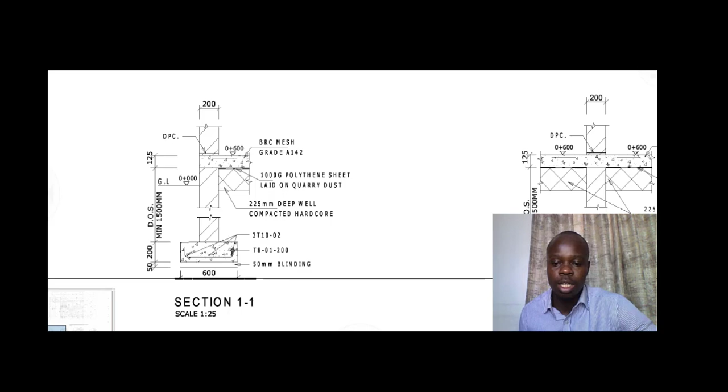So we'll be doing the items in the substructure works first, all possible items. I've prepared a comprehensive list of substructure items, along with a section showing which part of the standard methods of measurements those items are provided for, and also the specifications. Those are the key items or descriptions you always need to consider while doing your measurements. I think it's wise to do this so that whoever was digging for the rules one by one can now have it even easier, with a summary of these rules done all at once.

So that brings us to our session today, and this is what we've prepared for you: a comprehensive summary of the substructure elements, in regard to the standard methods of measurements. We have a list of the descriptions of the items, a column expressing the units of measurement, which is what's going to be translated into your bills of quantities, and also the standard methods section, the SMM section. After this session, when you search from that given part, you're able to get that given reference. This is meant to ensure you have clarity on what you're looking for in terms of measurement.

So it's quite important that we consider this, so that in our next session it becomes even easier when you are trying to measure. I always emphasize to my viewers and students that you must learn the rules and the units of measurements, because when you do so, whenever you're presented with a plan, it becomes much easier to undertake the measurement, since you know that for a given item, for instance cutting trees, it should be done in numbers.

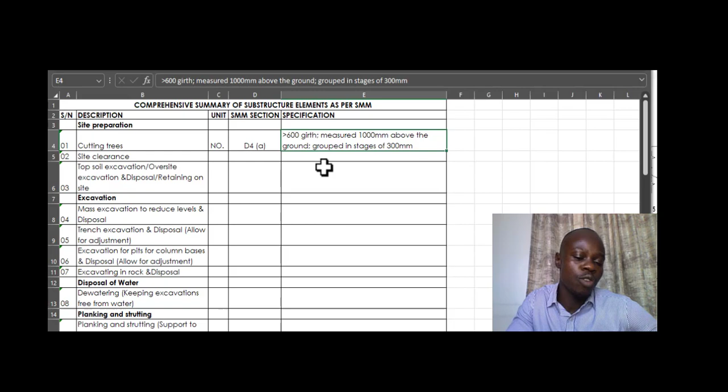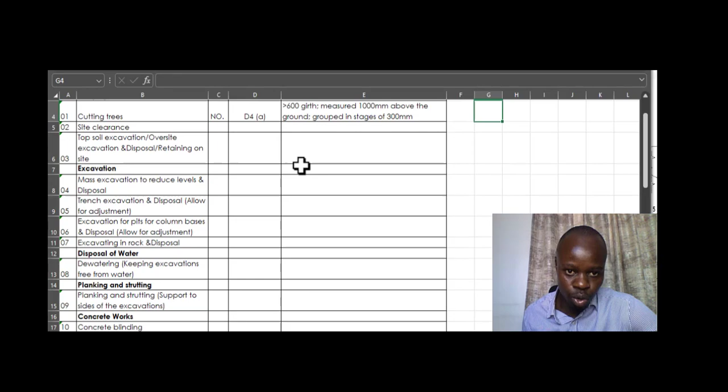You realize that when it's 600 millimeters, greater than 600 millimeters in girth, above the ground level, then in that case you identify it as a tree, and you now measure it in stages of 300. So the first stage, for instance, would be a group of 600 to 900, then 900 to 1200. So that is how you do that measurement.

Then we go to site clearance. For site clearance, how do you do that? It's measured in square meters. For the square meters, what is it that... okay, square meters. So we see from the square meters, what is also another crucial aspect that we need to consider.

It's from the section of D4C, and then the specific rules that are guiding it include the bushes, scrub, undergrowth, and grubbing up roots. Now those are the specifics, what you need to consider when you are doing the site clearance.

So of course for square meters, you just need to get dimension 1 and dimension 2. You get the areas. Depending on how you subdivide your plan, then you attain what is the final output that is needed in square meters.

Then we have the topsoil excavation, also done in square meters, and then the section where it's found is section D3. Now that is the section of the standard methods of measurements, where you are going to find that given rule.

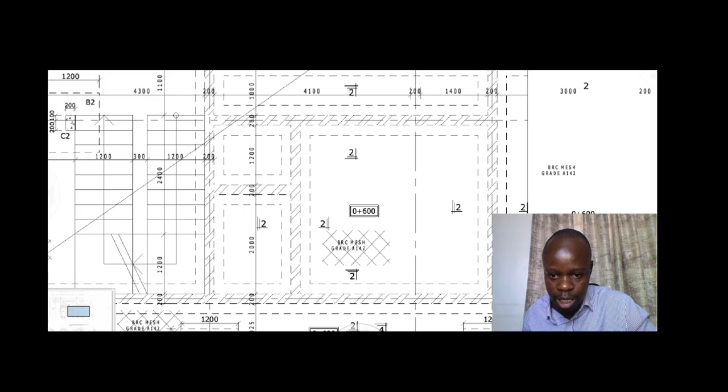Okay, this part highlighted here is now the wall. But then there are spreads, both the internal spread and the external spread. So normally when you are doing the site clearance, you will always consider up to the external spread. That is why when you look at the section I drew, you realize that the wall is there, and then to the external spread you have the oversite. So of course you'll do it to any thickness, for instance 150 millimeters thick, as I had mentioned.

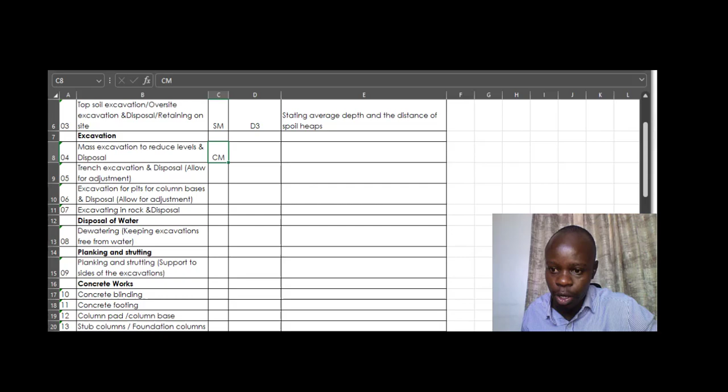So moving on, we've talked about the topsoil excavation. Moving on, we go to mass excavation. Mass excavation is done in cubic meters. So let's see from which section that is guided - from section D6 of the standard methods of measurements.

Once you've identified that, we now see the specific items you always need to remember. You need to know that if it's greater than 300 millimeters thick, that is when you do it in cubic meters. For instance, when it's less than 300 millimeters thick, then you do it in square meters, of course stating the average depth.

Then there are other items for the other part of that statement. For instance, basement, D5F applies. D5F is the section of the SMM which talks about measuring the excavations in stages of 1.50 meters. That is what that part is talking about.

These instances where you might have mass excavation include, for instance, when you have black cotton soil - soils whose characteristics will compromise the stability of the building. That means when you have them, you need to excavate all of them off the site. So when that happens, you also need to know how to go about that as the quantity surveyor. For instance, in that case, you need to measure them in cubic meters, especially when the thickness is greater than 300 millimeters. When it's less, you do it in square meters, stating the average depth.

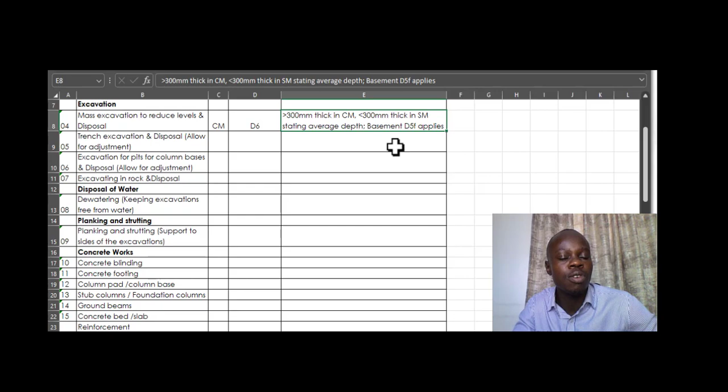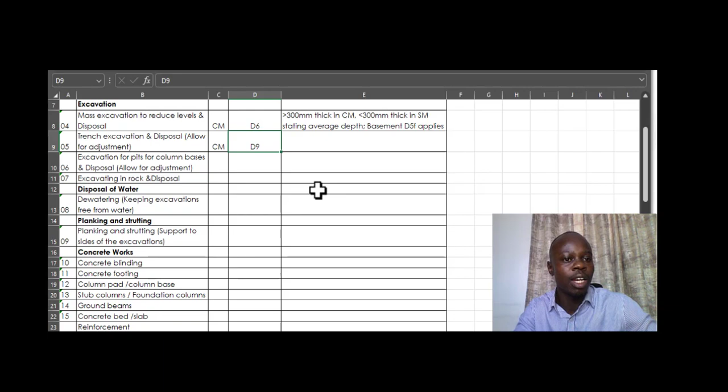Then we move on to trench excavation. Trench excavation is also in cubic meters, and you get that from D9, the section D9 of the standard methods of measurements. The rule states that in this case what you need to do is your excavations in cubic meters, and of course you conform to the rule of D5F, stating that you need to do your measurements in stages of 1.5 meters.

Okay, in this case there is normally one thing that is quite confusing, or gives my students a difficult time. That is now the disposal and also the return fill and ram, or what you can call backfilling. So let's look at this section which is also meant to make your work easier.

So at the time when you are doing your excavation, you've done the whole trench. For instance, you did your site clearance - that is process 1. After doing your site clearance, you've done the oversite, where you've allowed for stripping of the topsoil, for instance 150 millimeters thick. Once that is done, you realize that from that point, just beneath the topsoil stripping, you've already taken it away downwards up to the bottom of the footing, or you can say bottom of the blinding.

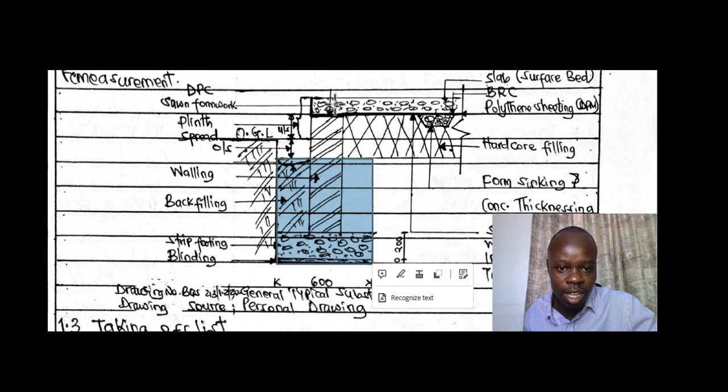But then there is always what we call adjustment - you can have the backfilling on both sides. For instance, if you have backfilling at this part, and also on the inside, the internal spread, then what you do, if you have these two, is what we call the backfilling.

So at one instance, you've disposed of the materials. You've allowed for the disposal theoretically, but then at another time you are going to allow for backfilling. This means the total volume you had disposed, you need to deduct the backfilling, and add the filling. So you deduct it from the disposal you had already done at first instance, and then add the filling to those given parts. That is basically what you mean when you talk about adjustment for backfilling.

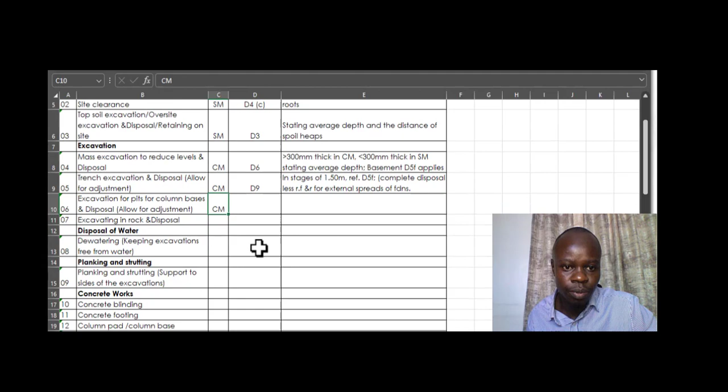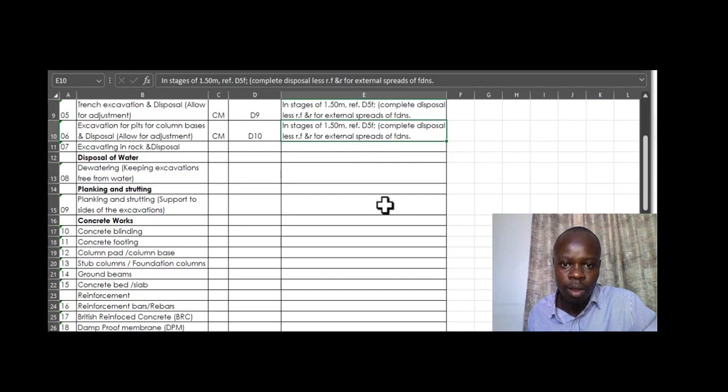Once that is understood, we move straight to the next item, which is excavation for pits for column bases. Whenever you're doing column bases, the rules remain the same, but you get it from D10, and the stages of excavation in stages of 1.50 meters is constant.

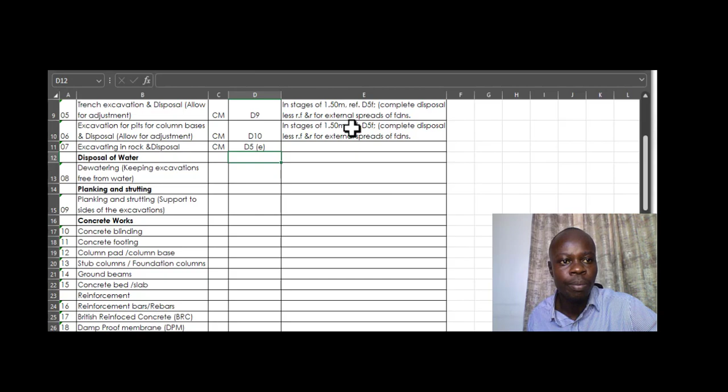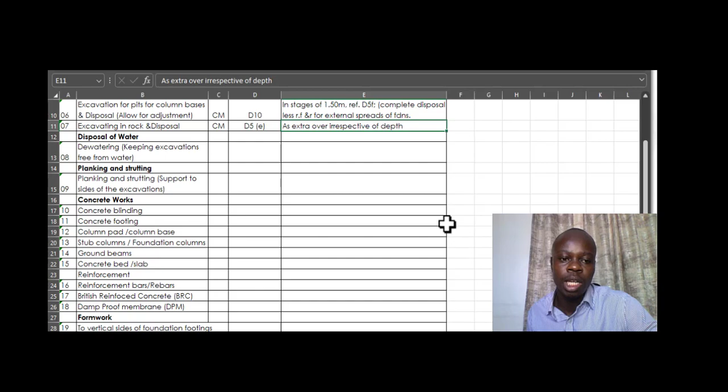When we move to excavating in rock, that is gotten from D5E. It's talking about extra over, telling you that you measure it as an extra over item always when talking about rock excavation, irrespective of depth. I'll keep reiterating that an extra over item means items you've already measured in your previous working, but you are also measuring them again because they require special treatment, meaning the cost implication is more than what was captured in the previous item. That is why you measure them as extra over in regard to that particular rule. Then the next is disposal of water.

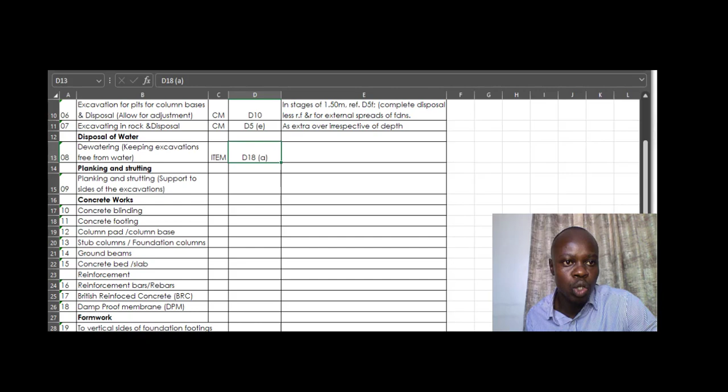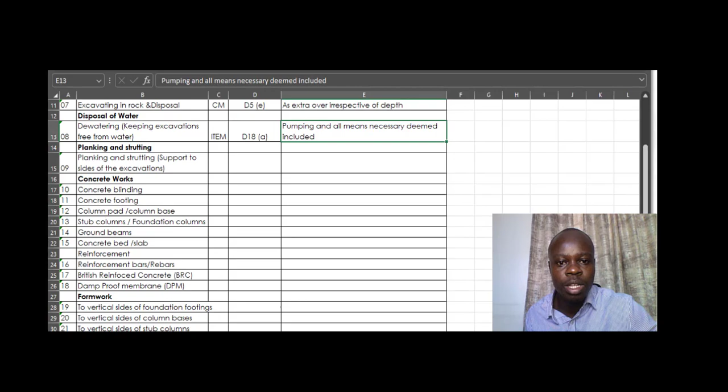These are measured as items, so there is nothing much to say. It's D18A, and it's always deemed to be inclusive of all items, including pumping or any other means necessary to dewater the site at a particular time.

Then planking and strutting, which is basically support to the sides of excavations, to prevent the materials from returning back into the trenches or pits you've excavated. Reason two is also to prevent possible damage or injuries to the workmen, so they are not hit back by the items you've excavated and taken off the trenches or pits. You go to section D19 for the specific rules, and that is it.

Then we move next to concrete works.

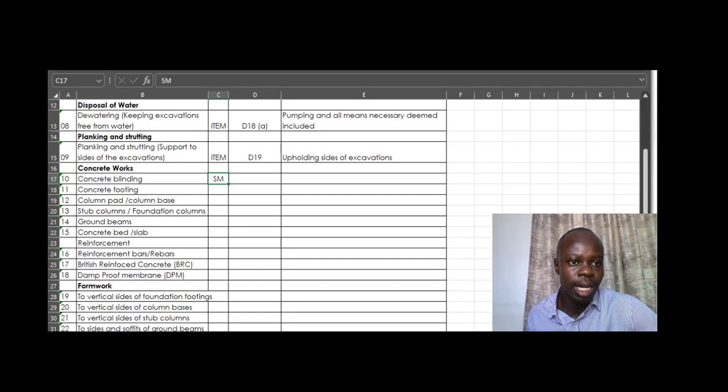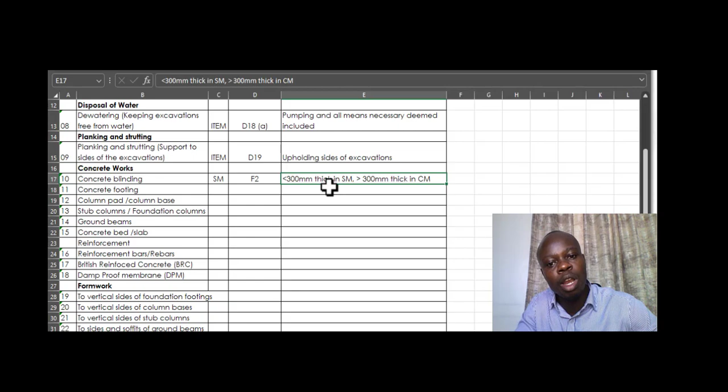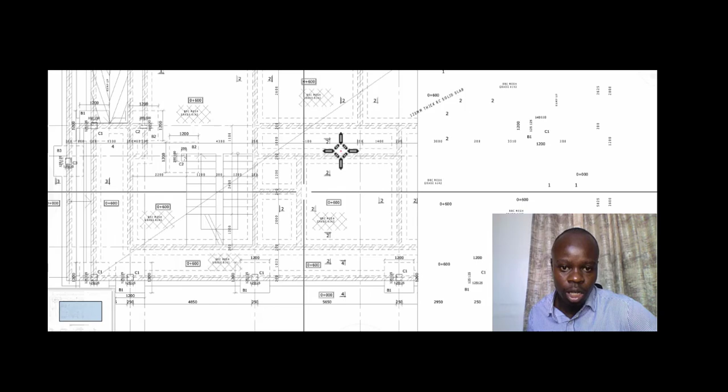Concrete works: blinding is measured in square meters, section F2, and when it's 300 millimeters thick, that is the threshold. Beyond that you can do it in cubic meters; below that it's in square meters, stating the thickness of that given blinding. Looking at our section drawing to make it easier to understand, you can see where the blinding is, below the strip footing. That would mean whenever you have the length for your trench, that length should also be used for your blinding, times the width of that particular trench, which is sufficient to give us the area for the blinding.

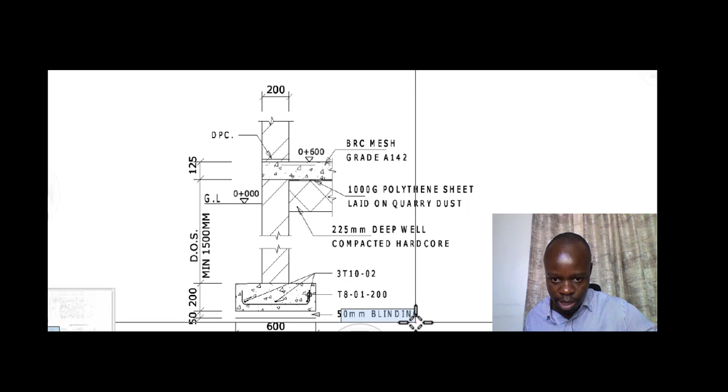The same applies here, even though it wasn't represented in this section, it's still there. I can see we have blinding at that particular part, where you have the 50 millimeters blinding. So blinding is an item, and we've seen how it's measured in terms of the summary we are talking about.

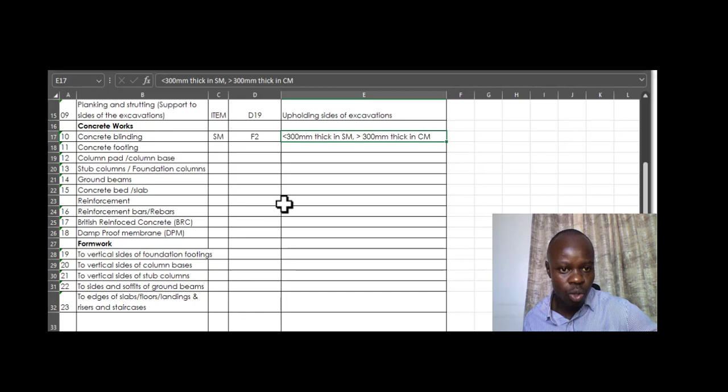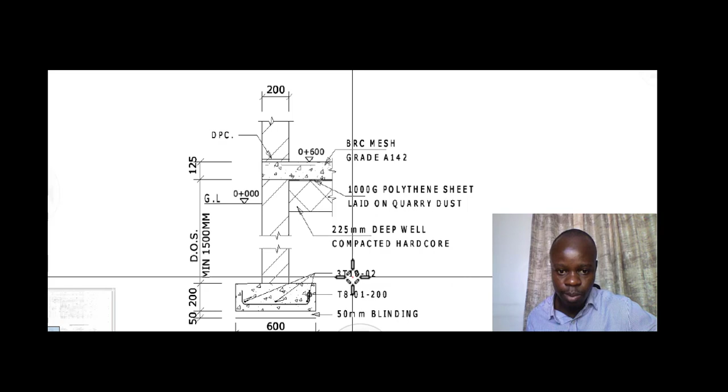We move straight to the next item, concrete footing. For the concrete footing, it's done in cubic meters, section F2C, that is where you can find it. Talking about footing, this is the footing described here, so you understand what we mean. That is the footing, measured in cubic meters. From the other drawing, it's also represented just above the blinding. That is well noted, so we move to the next item.

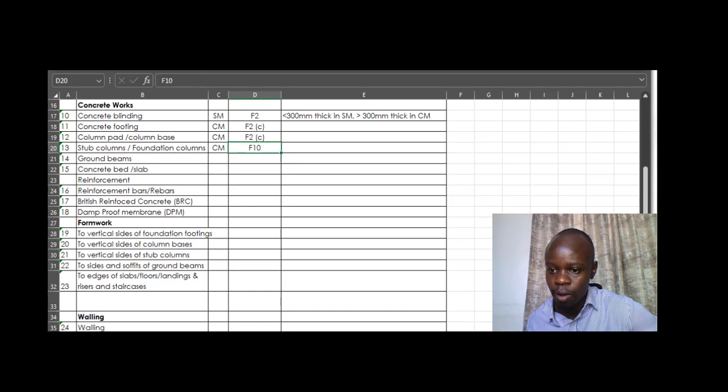The next item is the column pad or the column bases, in cubic meters as well. Then stub columns, the foundation columns, in cubic meters, found in section F10 of the standard methods of measurement. Then ground beams also in cubic meters.

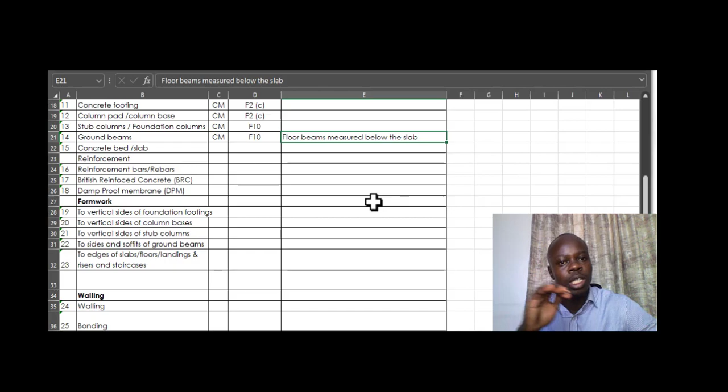For the beams, there is something worth noting: floor beams are always measured below the slab, in the sense that when you have that particular representation, you shouldn't consider the beam from the bottom or soffit to above the slab. You measure it below the slab. That is what the rule tells us to do.

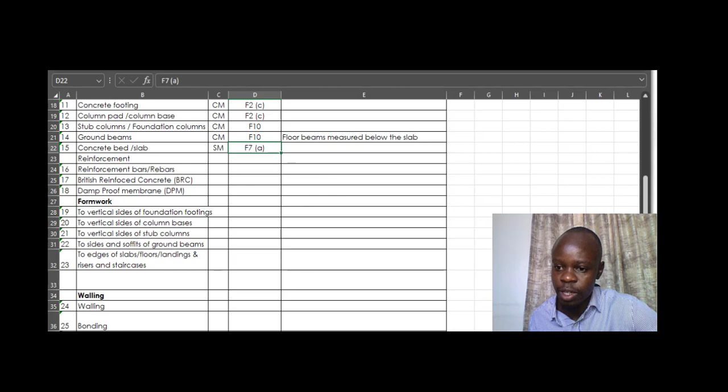Then concrete bed is done in square meters, stating the thickness, and you find that from F7A. Then reinforcement bars is in kilograms.

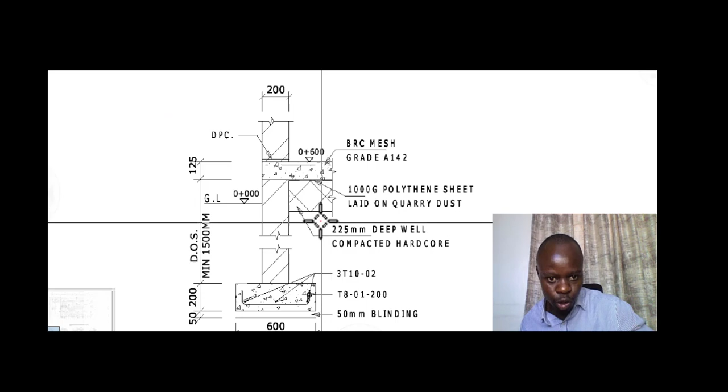Considering the reinforcement bars, let's take a look. This is how they are represented. For instance, in this section here, we have the main bar, that is now the bar that is bent, with the turn-ups.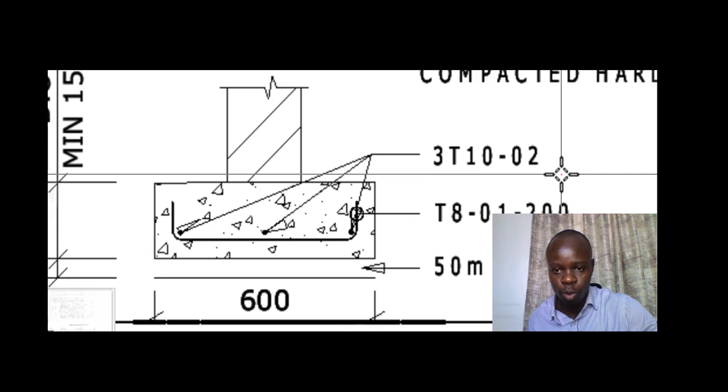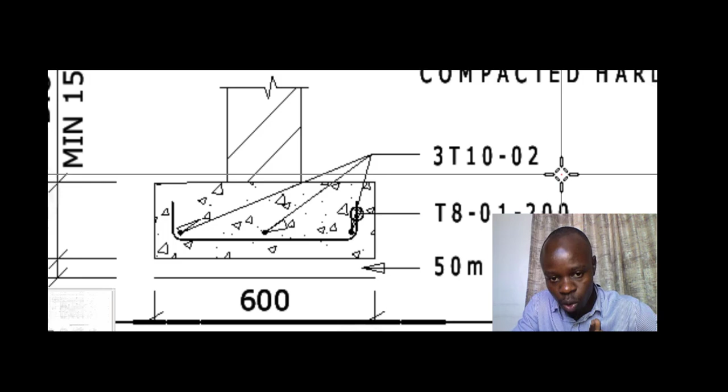The 3T10-02, that shouldn't worry you, because when we come to take off our measurements, we'll go into the details of interpretation of these annotations and dimension bars, and how to measure them exactly on the plan. So stay put, because that time is coming. But for today, it's basically a summary of all the items we've covered, in terms of the rules and the sections where you find their measurements.

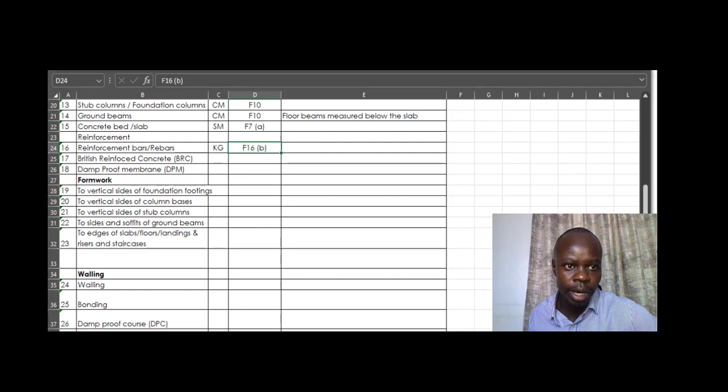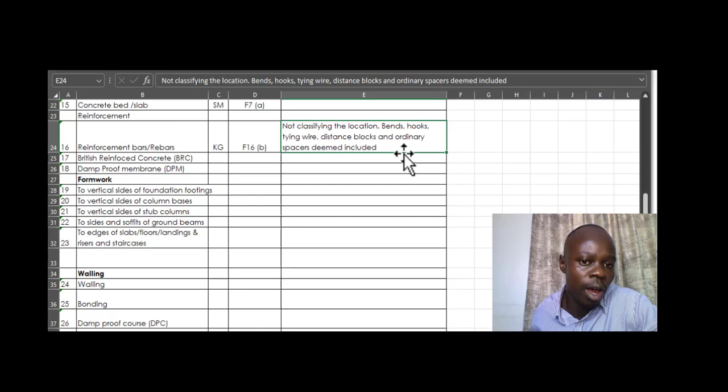Then we move on. We've talked about kgs, section F16B, and then we have not classifying the location. Whenever you are talking about the measurements for the reinforcement bars, you don't state that it has to be in floors, or for the footing or pad. You can always just talk about the reinforcement bars in terms of the diameters, but not necessarily in terms of the locations. You can do so if you wish, though it's not a requirement from the rule that you specify the locations in which those reinforcement bars are put.

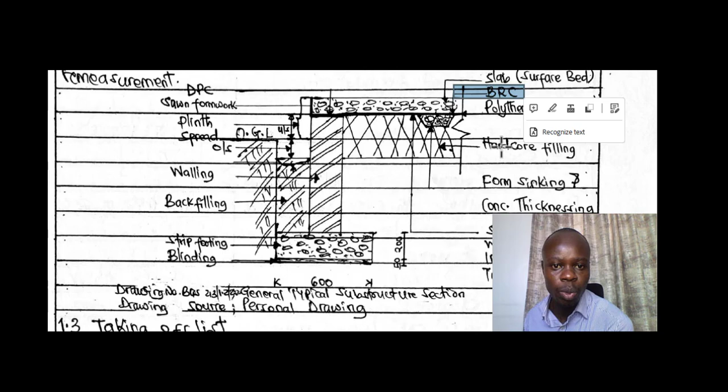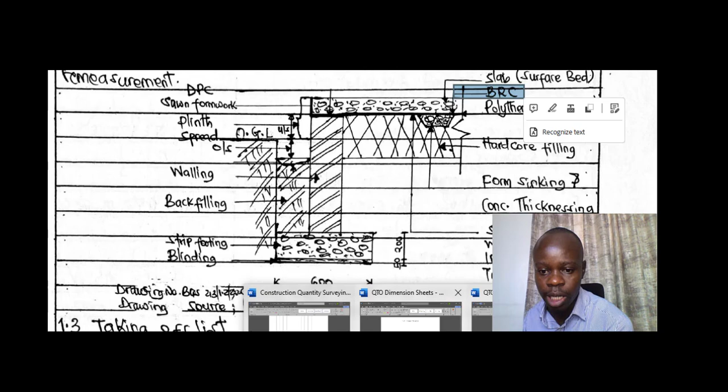Then we have British reinforced concrete, that is now the BRC. Let's just take a look at what I have. When you look at this drawing, you realize you have a BRC indicated at this point, just below the slab. Of course, immediately below the slab, because it's a reinforcement meant for the slab in that particular place. So when you notice that, it's even easier to understand that in this case, you need to use the same area, because you do it in square meters of the plan that you are provided with.

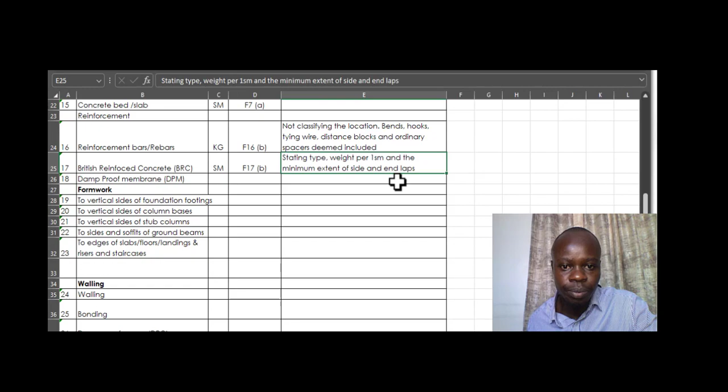Then it's from section F17B, and you state the type, weight per square meter, and the minimum length, minimum extent of side and end laps, provided in that order.

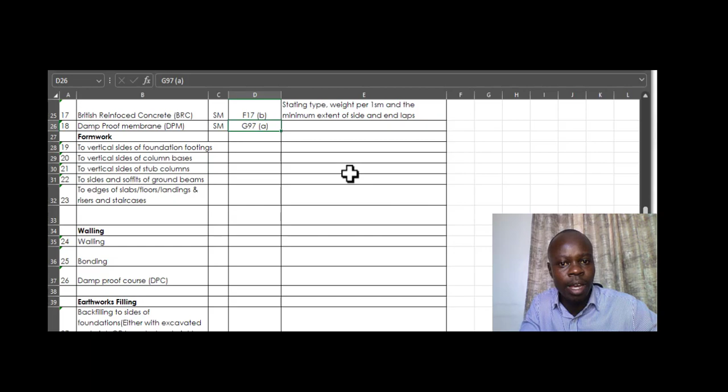Then we have Damproof Membrane, that is the DPM. You want to get where the rule is stated, go to G97A, that is where the rule has been expressed. When it's less than 300 millimeters wide, you measure it in meters. But if it's greater than 300 millimeters in width, then you do it in square meters.

There is no allowance that you should give for the laps. Let those be allowed for when they are ordering materials, for the contractor. So it's a little unfair, but that is the rule. I believe historically, before this rule came to change, when the allowance was given at the discretion of the contractor, it wasn't uniform - every contractor would give his or her own allowance for items that are lapping. So you'd find that the quantities would be more than what is supposed to be there. That's why for the measurements, those allowances and laps are not allowed. You do what we call net measurements.

So we move to formwork. For the formwork items, we are talking about the substructure works. For the substructure works, there are a few instances where you find the formwork, and they have to be measured. The very first one we are talking about is the vertical sides of the foundation footings.

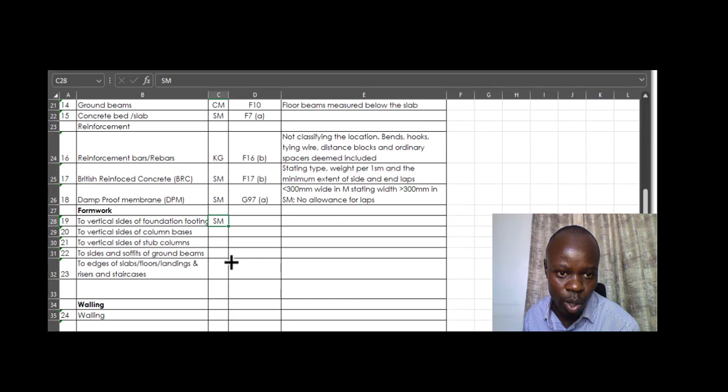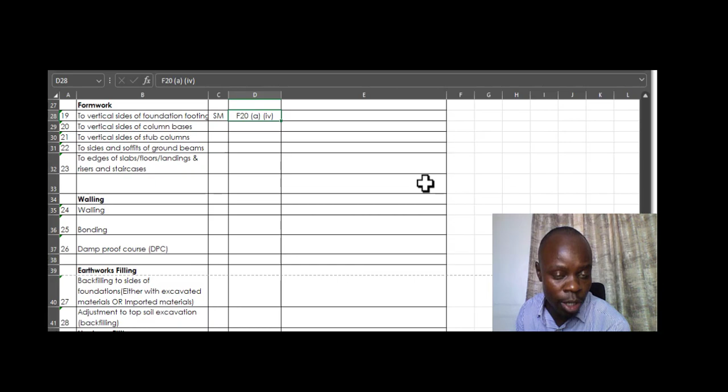So how do you measure that in terms of the units? That one is done in square meters, as you can see there, and the section is F20A Roman 4. If you go to that specific section, you will find out what we mean in terms of the specification of the rule for its measurement.

To the vertical sides of columns, also in square meters, the same identification, the same section of the standard methods of measurements. For the other one, same section, but A at Roman 6, also stating square meters. Sides and soffits of the ground beams, also square meters at Roman 4, F20A Roman 4.

And then to edges of slabs, floors and landings and risers and the staircases, done in meters. So here's a bit of explanation. When it's done in meters, it needs to be expressed in terms of stages of measurement. So when you're doing the stages, they conform to stages of 75 millimeters. So you do it in linear meters in stages of 75 millimeters.

Let's take a glance at what is expressed in the drawing so we see it even better. The strip footing is down here, and now the formwork we're talking about should be at the sides of the same. So you realize we're going to do the formwork to both sides of the strip foundation footing. When you're talking about the mean girth, the mean length, when you do it times 2, it should be cancelling out.

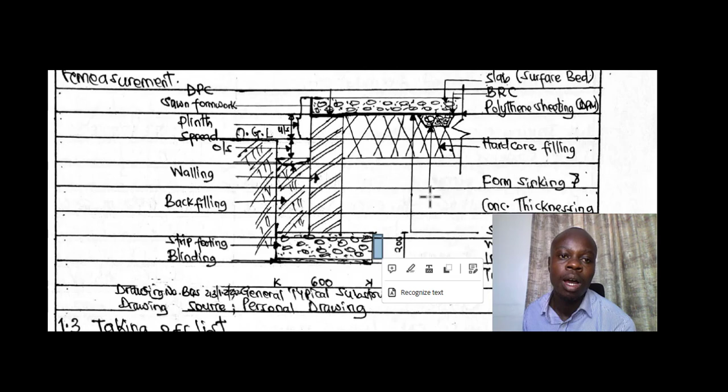So that is just an assignment for your side, try to work that out. For instance, for one side and the other, you may add the two together - internal side and external side. Alternatively, do the perimeter or the mean girth. When you do the mean length, multiplying by 2 should give you the same measurement in terms of the length.

Well, then we move next to the walling. Let's see what walling is all about - square meters, G4A. The rule states that you measure the wallings in regard to the mean length and the average height. The average height - even when you have a slanting wall, you need to get an average height. That's what the rule is talking about. The mean length would mean you measure at the center line when you're talking about the area for the wall. So it's as clear as that.

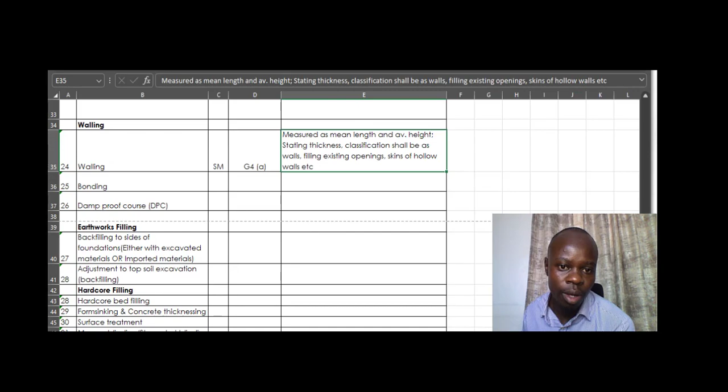Then bonding. Bonding is a special treatment where walls connect to each other at the ends. So you measure it in linear meters, and then you state the types of wall - wall 1 to wall 2, using the specifics. For instance, you are bonding a wall of 200 millimeters wide to a wall of 150 millimeters wide. In that case, you just need to specify which type of wall you are bonding to which one, and then measure that length, the point from where they connect to the end of the same.

Then damp proof course is in linear meters. Then you state the width of the same.

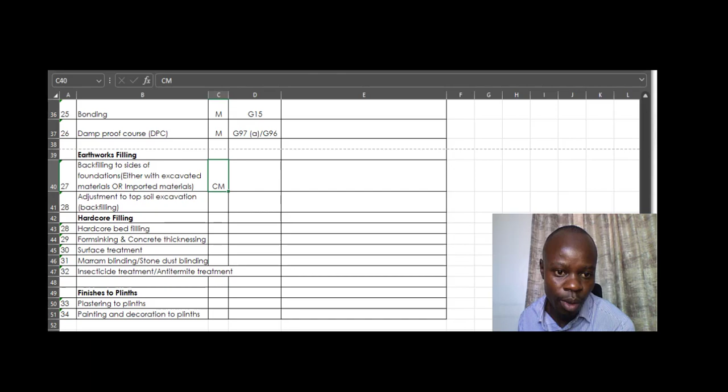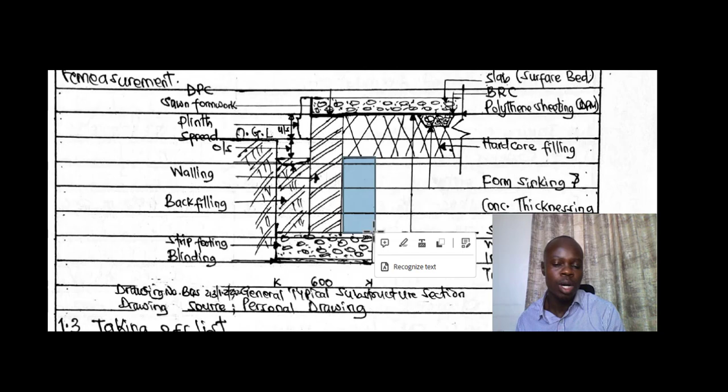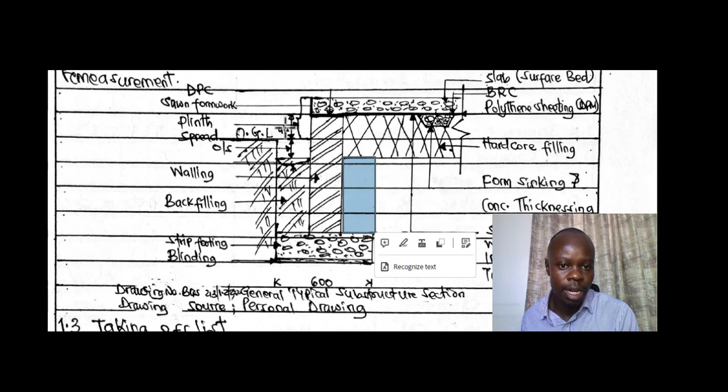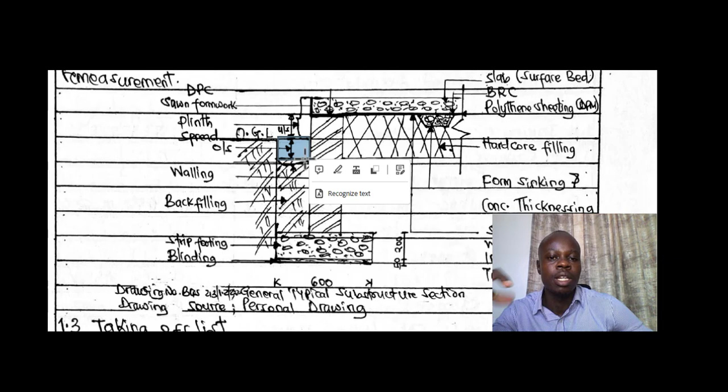Earthwork filling - we talked about this. Let's see, from the expression in this drawing I explained a moment ago when we were talking about earthwork filling, you can have filling on either side. You have filling to the internal spread, towards the internal side of the building. Then you can also have backfilling towards the external spread of the building. All these earthworks are considered and measured. And another backfilling can occur especially when you're returning the topsoil that you had excavated and taken off the site. So all those items are also provided for.

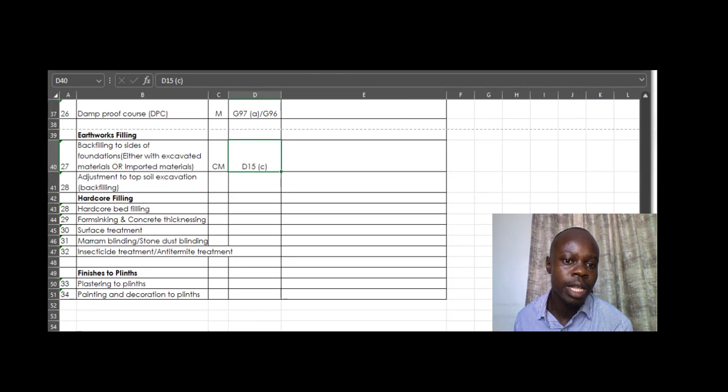Of essence is for us to know how they are done. Of course, here it's done in cubic meters, as the rule states. D15C should give you what is stated about in that particular order.

Then we talked about adjustment for the previous disposal, so you need to deduct this quantity. Once you have the backfilling to the sides, you now need to deduct it from the disposal that you had measured when doing your general excavations for either trenches or column pits for the bases and so on.

Adjustment to topsoil excavation. In this case, we talked about excavating these materials and disposing them to a spoil heap a few meters away from the construction site for reuse, for instance for landscaping etc. When you're doing this, you need to make an adjustment because the soil you measured and provided to be taken off site, there's now another portion that you're taking from the spoil heap and bringing in to the external sides of the foundation. So that is what that is talking about.

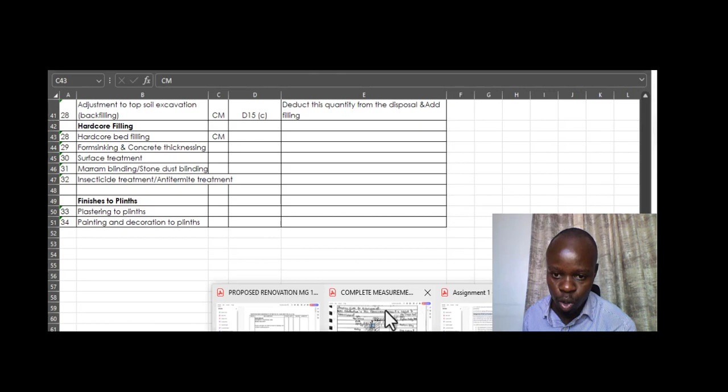Then next we are talking about hardcore bed filling. As usual, we try to bring it even more easier for you to understand.

The hardcore bed is just below that. Of course, this is essentially to make up the level because you don't want to lay your slab at ground level. So it's essentially you are doing hardcore filling bed to make up the level for you to lay your slab or concrete bed.

For that case, in this particular order you can just see where it's located, and for you to measure it, it's in square meters when it's 300 or less. I explained that 300 is the threshold for this case, so at the 300 mark, you do it in square meters.

Of course, the rule also explains that you need to state the stages in which you are doing such measurement. So if it's stages of 150, hardcore packing, and the quality of packing, all those you need to state clearly. So it's in cubic meters when it's more than 300, and when it's less than 300 millimeters thick, then you do it in square meters.

Then we have form sinking and concrete thicknessing from a stage of section D20F, okay, stroke F. The capital F is now the part of concrete works, that is concrete works now will be guiding you how to measure the concrete thicknessing.

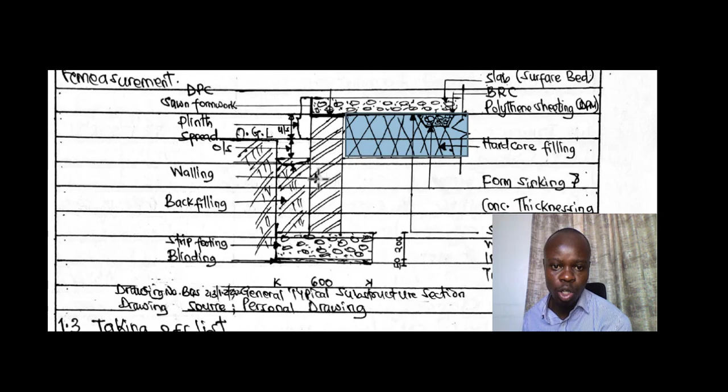Moving straight to what we have here, we are finishing the plinth, and the plinth from the drawing can be shown in that area. The edge of the slab, and that edge, the side, you can call it the underside of the slab. Now that part of the wall that is exposed just slightly above the original ground level - this particular drawing is able to show you that quite pretty well. So that said, that is now the area that you need to finish when you're talking about finishes to the plinth. So it's in square meters.

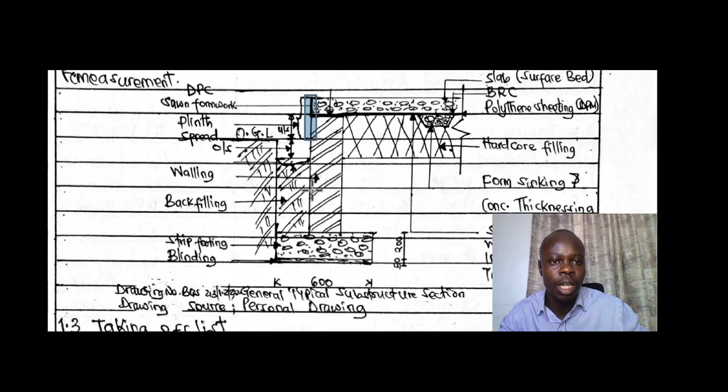Section is T4A, and then painting and decoration, of course, that is coming under the finishes. So that said, now we have a proper comprehensive list that is giving us all the items we need, all in summary, and what we need to focus on when we are doing our estimation.

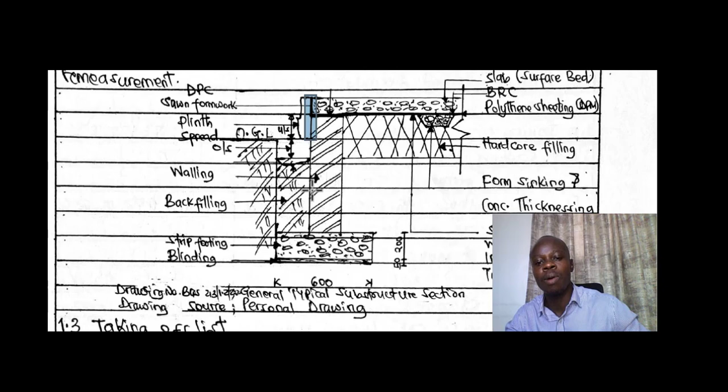So this is now the very last theoretical part. Then next, we are going to take off our drawings in terms of substructure, so that we see what we are expressing, whatever that we've been explaining all that time.